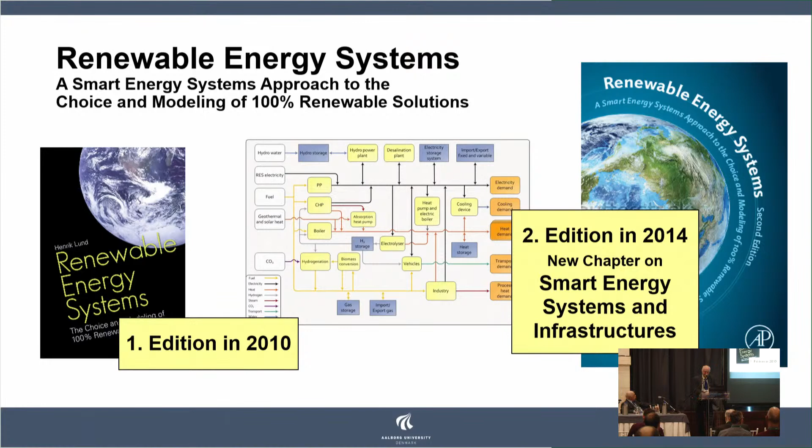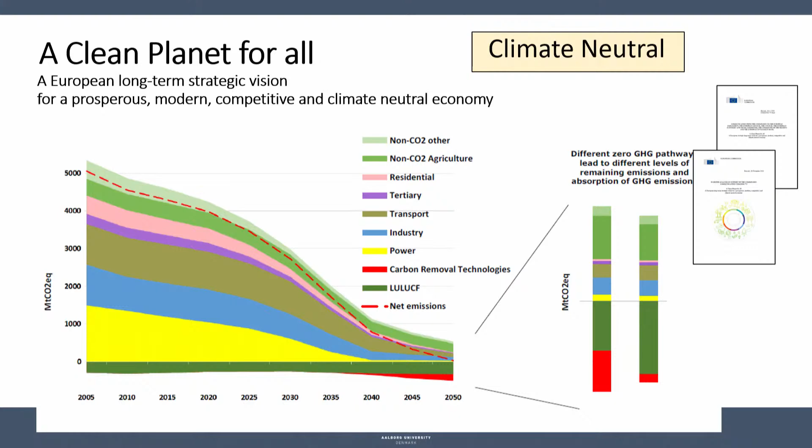And just as an example, this is taken from the European A Clean Planet for All report they issued a couple of years ago, and they use this word climate neutral, and they also look not only at the energy sector, but much broader than that. And when we have politicians looking into these types of goals and targets, then I think it's our contribution from the scientific point of view, and also from industry, to say how we can do this, because it can be done in many ways.

And no matter if we word it 100% renewable energy or climate neutral economy or however we put the words, there are different ways of doing it.

And what I'm sort of in, and I believe many of you also, we are in the business of identifying the best, the most doable, and the most affordable ways of making this green transition, both from a technical point of view, but also from an economical point of view, and also from a road mapping political point of view. How can we do this, and how can we work as researchers in order to identify the best and most affordable and most doable ways of doing it.

And the way we work with this in my research group, and I guess many others do in principle the same, is to put our energy systems into computer models and then play around with: now if we build a lot of wind turbines, what will happen and how can we deal with that, and many of the other things. And that is also what we do at Aalborg University with this model here that is a freeware already mentioned by Soteris. So please download and play with it if you wish.

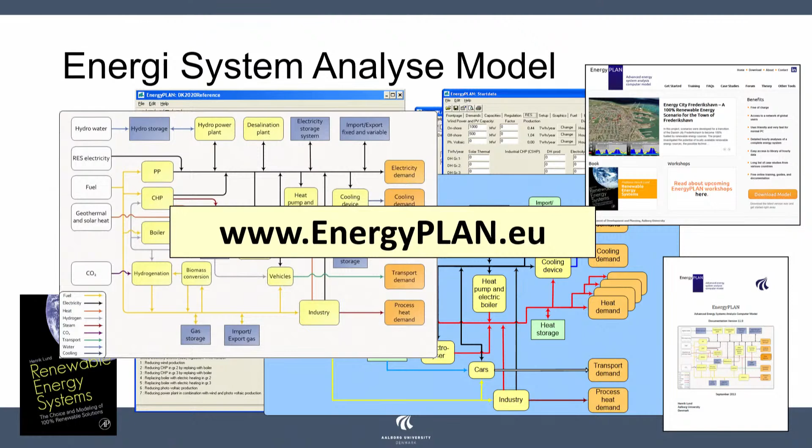When we talk about smart energy systems, and I will elaborate a little bit on that, because this is our suggestion to an approach to take if we should organize ourselves so it will be doable for us and possible for us to identify the best ways. Then I always start with saying a little bit about smart grid, because the reason why I and others started promoting the concept of a smart energy system is because we once had this smart grid popping up.

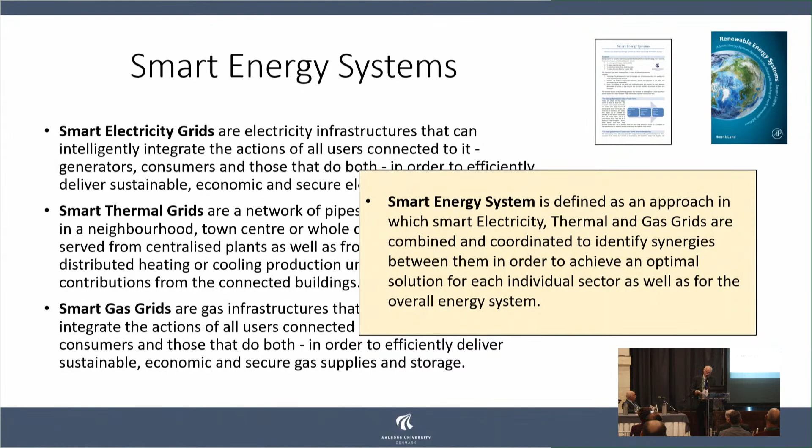But the point we tried to make by doing this is that if we really wish to be really smart, then we should not be smart within the different grids and in the different subsectors. We should be smart across the subsectors, and that's how we define the concept of smart energy system, that is taking a cross-sectoral approach to be smart and also identify the synergies between the sectors.

We published a review paper about that some years ago. There we can see that its concepts have sort of been implemented and used in a number of papers since, even though there still seems always to be some discussion on what exactly we are talking about and what is the definition. But at least this is sort of developing itself in a direction where we agree more and more upon that.

But what is a smart energy system? You can say it's an approach to identify the best and most affordable solution. It's sort of a guideline. If you wish to really do this well and be smart, then how should you do it?

You can even say it's a theory, because when we promote this and I talk about it, I make the theoretical statement that if you wish to identify the best and most affordable solution to the green transition, you must take a cross-sectoral approach. You must take a holistic smart energy system approach. Otherwise, you'll push yourself into some corners of the whole problem and identify suboptimal solutions. So that's the idea about this.

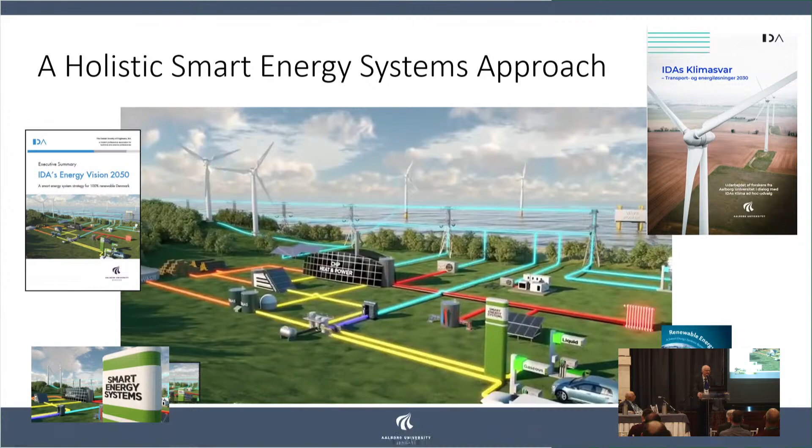And basically, the idea is to recognize that the different subsectors and different smart grids need one another in order to find the best solution. It's very difficult to green the heating sector without some kind of input from the electricity, heat pumps and the like, and also excess heat from different processes and production. That is the most affordable and best way to green the heating sector. And maybe you cannot do it without certain inputs from the electricity sector. So the electricity sector will have to help the heating sector.

Also, the electricity sector will have to assist the transport, because we should have electric cars, but not only that, also all kinds of power-to-X to deal with sustainable aviation and things like that. So we also need the electricity sector to assist the transport sector. But then in return, the transport sector and the heating sector can make a very important contribution to the electricity sector, and that is in the balancing of wind and PV.

Because if we recognize we have to convert some of that electricity into heat or gas or liquid fuel or whatever we need in the other sectors, then we also have the possibility of storing all the fluctuating wind and PV after it has been converted into something that is much more storable and affordable to store, rather than try to store it as electricity consumption or electricity production.

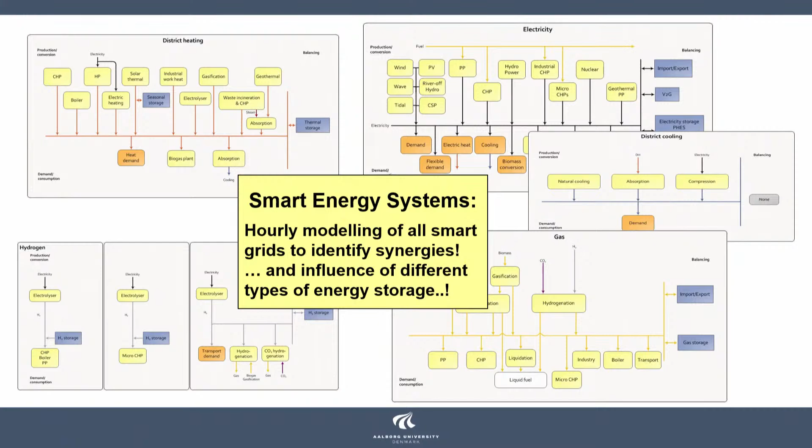And that's what we have designed our tools to be able to do. That is to take all sectors in and make hourly calculations of all the sectors, and also to include as many conversion units as possible and various types of storage, so that we can play around with it. Can we identify those synergies? And can we design a system so we can do with the affordable technologies and don't corner ourselves into being forced to invest in the very expensive technologies? That's the game.

And one of the reasons why this is incredibly important, and why, if you take this approach, you will be able to identify better solutions than if you don't, is that there is a huge difference in cost if we try to store energy as electricity. I define electricity storage as you put electricity in, and then later you take electricity out.

It could be a lot of technologies, of course, batteries. It could be, as illustrated here, pumped hydro. It could be converting to hydrogen and back. We don't have mountains in Denmark, I often say, so we cannot use pumped hydro, but we can use compressed air energy storage instead, and so on. There are many technologies, but common to all of them is that they are in the order of magnitude 100 times more expensive than building a thermal storage.

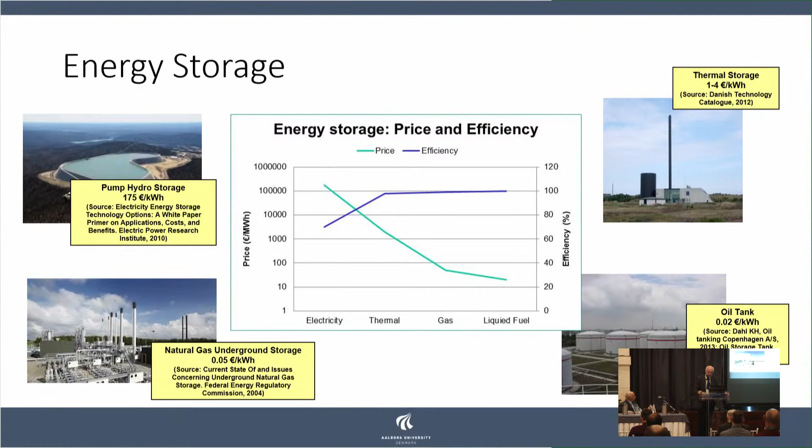And this cost relation is important because if we can design a system in which we do not really need a lot of electricity storage, then that system will be so much more affordable compared to if we can't. And that's why this is important. This paper here documents all the numbers I just used.

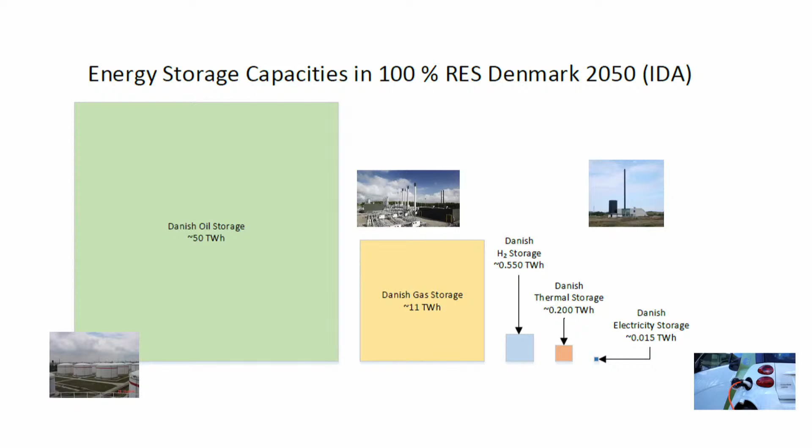And when we do this, the only electricity storage we have is actually the one for the electric vehicles. And as you can see on this illustration, it's very small compared to all the other types of storage we need in the system. And this is a system that we have calculated hour by hour in all sectors, 100% renewable energy in 2050 for the case of Denmark, where we can document how all storages are filled and emptied, so we can document this can work with this storage as you see it here. And that's good news, because this means that we don't really have to invest in a lot of electricity storage, which is good because they are so expensive.

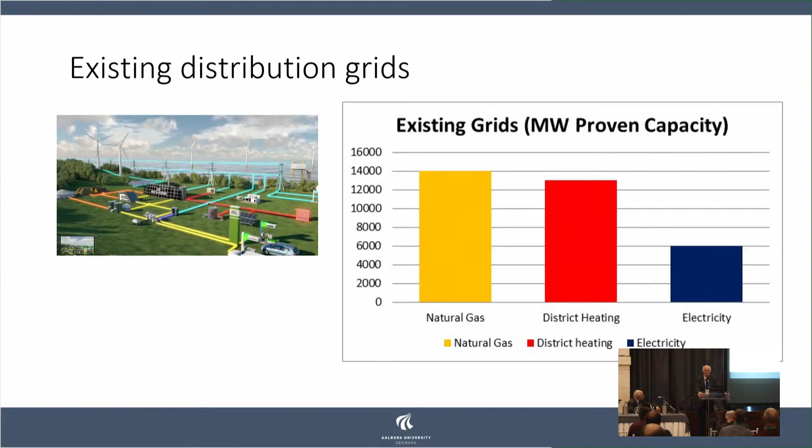And we calculated once, if we put everything from the heating sector onto electricity, converting everything in Denmark into electric heating, then we would have to build a lot of wind turbines to supply that, and that would cost a lot of money. But then we also calculated what the cost of the grid would be. And the cost of the grid exceeded the cost of the wind turbines, because expanding the distribution grid in Denmark by a factor of 4 would be extremely expensive. And then we also calculated that if we also need electricity storage, the cost of the electricity storage exceeded the cost of the grid, which exceeded the cost of the wind turbines.

So the idea here is to say that we already have some infrastructure ready. And of course we should electrify a lot. We should have electric cars and also electrolyzers and a lot of things. But there's no need to overdo it, because if we overdo it on the distribution level, then it will really cost a lot of money.

But if we do not overdo it and make use of the existing infrastructure and then add to that more on the transmission level, and the transmission level is so much more affordable to increase than the distribution level, then this is doable. So these three things here with the infrastructure of the grids, the infrastructure of the storages, and the cost of the storage, this is just to illustrate why taking this holistic approach is so incredibly important.

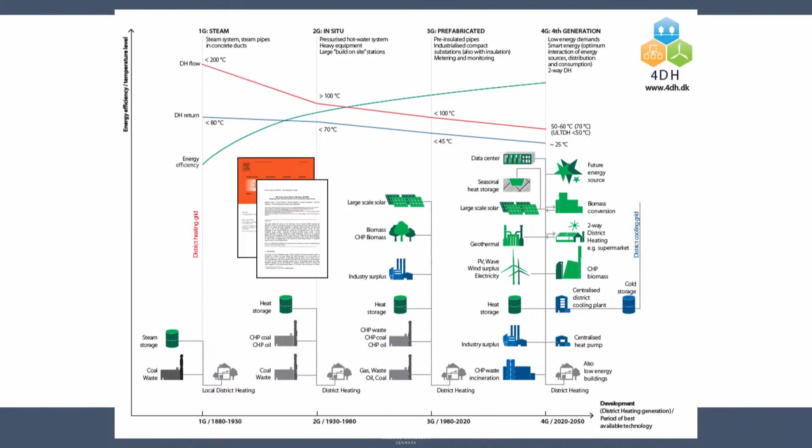So right now all people who have a gas boiler in Denmark, or oil boiler for that matter, or electric heating for that matter, they are calling their local district heating company and want to be part of the district heating supply. And all district heating companies in Denmark are expanding as fast as possible, but still it will take them several years to put all the rest of the customers into the systems.

And then you can say, is this stupid? Because one of the reasons that we have so much district heating and have so much success with it is that we have been producing our electricity on steam turbines fired on coal and whatever. And this is not something we should do in the future, because in the future we should replace these coal-fired power stations with wind and PV. But from what we see, there will still be, or there will be even more excess heat in the future.

And we have sort of looked into in Denmark what we have of industrial excess heat potential that we are not already using. And even though we electrify some of them or put them to biofuels or whatever, we will still have a huge potential in the industry. We also looked into the expansion of data warehouses in Denmark right now, and we're expanding them so fast that if we succeed, then in a few years, the potential excess heat from our hyperscale data centers in Denmark will be equal to 1/4 of our district heating demand, quite a lot.

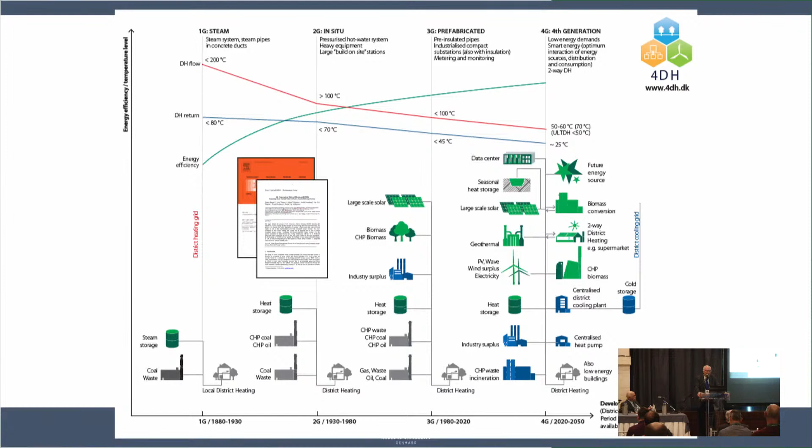The really important thing is that the sources for providing district heating in the future, no matter if it's a heat pump or one of the many resources I just mentioned here, geothermal energy, waste, whatever, can do so much better if they are allowed to deliver at a lower temperature compared to what they are now. So that's what we promote as the fourth generation district heating technologies.

And we have also been promoting this on the European scale, and actually the European roadmap studies, there are 4 of them now, have shown how it will be both more affordable and doable to implement the political goals in Europe if we include district heating compared to if we do not. And we also aligned that with what we call Smart Energy Europe, a study where we have looked at the whole of Europe, and we also looked at it at the city level.

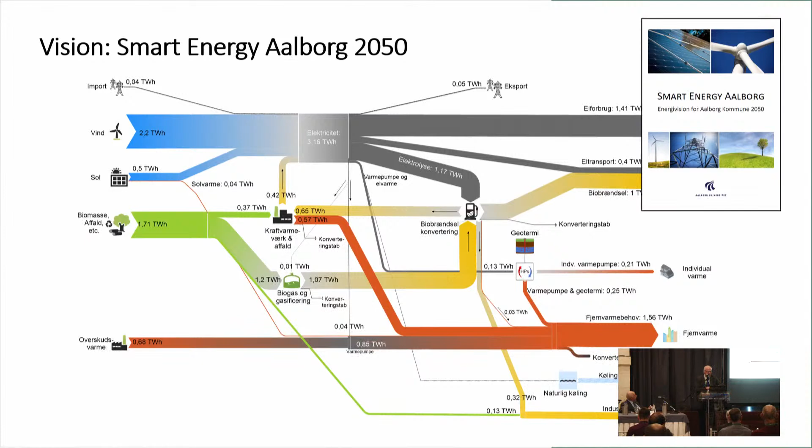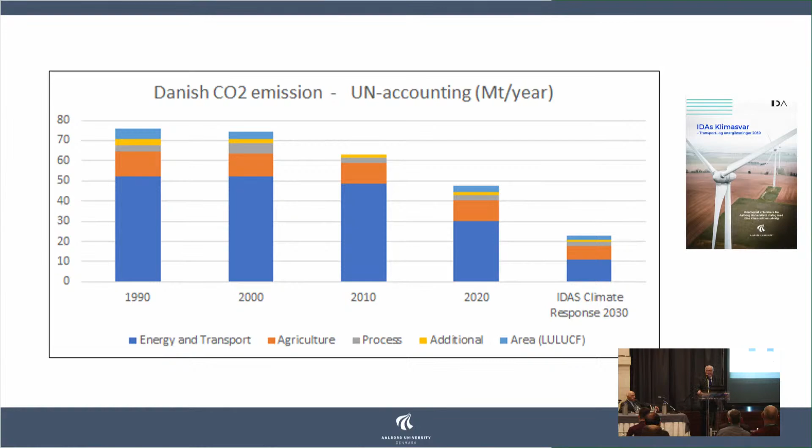But additional to that, we also have agriculture. In Denmark, we have a lot of agriculture. And we have processes from industry and so on and so forth. And all these other sectors also emit greenhouse gases. Maybe not carbon dioxide for all of them, but it's still part of the greenhouse gases. So somehow we will have to align ourselves with those sectors so we can achieve it for all sectors, so we can go climate neutral and implement those targets.

So we did a study. We have done a lot of studies, our research group together with the Danish Society of Engineers, starting back in 2006. But recently we did a study where we updated our studies and related them more to the new political goals. And one of the things we had to ask ourselves is, if we make a study on how Denmark should do the green transition, how should we then look upon Denmark as part of Europe, as part of the world?

Because there are so many ways you can do decarbonization and renewable energy. One way is to import ethanol from Brazil, and then you've more or less dealt with the transport sector. Or you can build a lot of wind turbines and then export them and claim that they are replacing coal-fired power stations somewhere else.

But what we said to ourselves, and we produced a guideline on how to think about this, is that it will not make any sense that one country, no matter if it's Denmark or any other country, does the green transition if all the other countries are not doing it. Then we might as well forget about it. So this is something we do together, this is something we do in parallel.

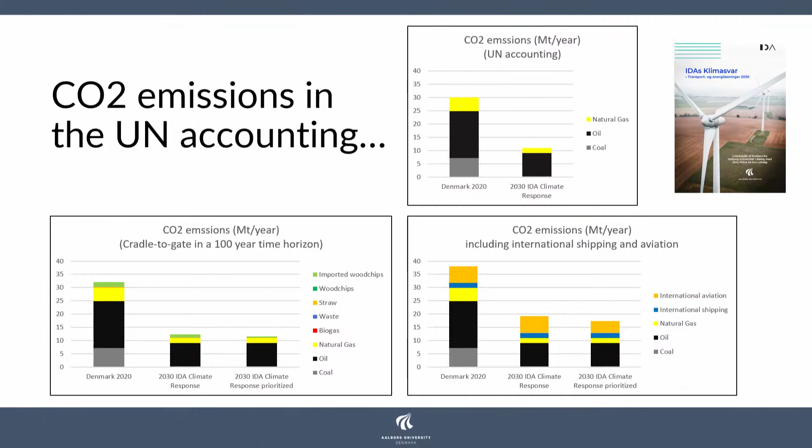But what is really important is when we identified our share of international aviation and shipping, and you can see that to the right there in the orange and blue color, then it really changed the whole picture. Because if we include that, then it's a quite different ball game. Then we really have a much stronger challenge than is so far recognized by the politicians.

So we did a strategy for 2030, and even though the Danish Parliament has the target of 2050, we said maybe we can do it a little earlier. So we said 2045, just to put that on the agenda. And now we have started a race in the Danish Parliament, where we have 12 parties, and some of them say maybe we could do it even before that. So now I have started saying maybe it's not only a race on how early we can do it, but also a little bit on how we do it. So that's the issue right now.

But what we then defined is a fully decarbonized Denmark by 2045 in all sectors. And the important part here, when we see how we should collaborate with the other sectors, is that we cannot really see in Denmark that we can bring some of the other sectors to zero. We can do a lot within the agricultural sector, but we don't think we can bring it to zero. We think we still will have to produce some cement; we have a cement factory in Aalborg, and we don't think we can bring it to zero. Of course, we can replace fossil fuels, but there's still something in the processes with this type of industry and others also. The same for flight contrails and whatever.

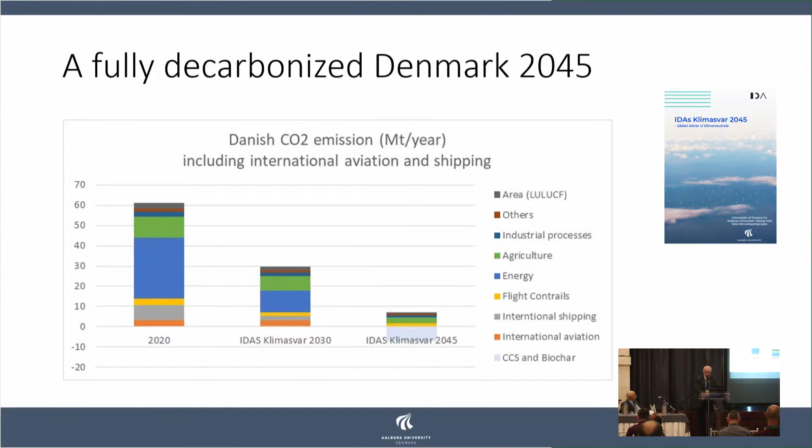Our approach from our study is that we should not dismantle biomass. We should further develop it in the direction of making sure that it's sustainable, and we should also actively make use of residual resources that are sustainable. And what is also important, develop it in the way that we use it in the correct way. And this diagram here is our very complicated approach to how we use what we believe we can identify as sustainable biomass in Denmark. And then we use it in various technologies.

And the reason why we use it in various technologies is twofold. The one is that all these technologies are not available on a commercial level yet. Some of them are, but not all of them. And maybe they will not be commercial within the timeframes we have. Maybe they will, maybe they won't. For that reason, it's good to have a combination of many technologies, so if one is failing, then we may be able to use the other. For example, if you look at straw, the pathways are manifold: thermal gasification, biogas plants, and so on. That's one reason. The other reason is that there are strengths and weaknesses of all these technologies.

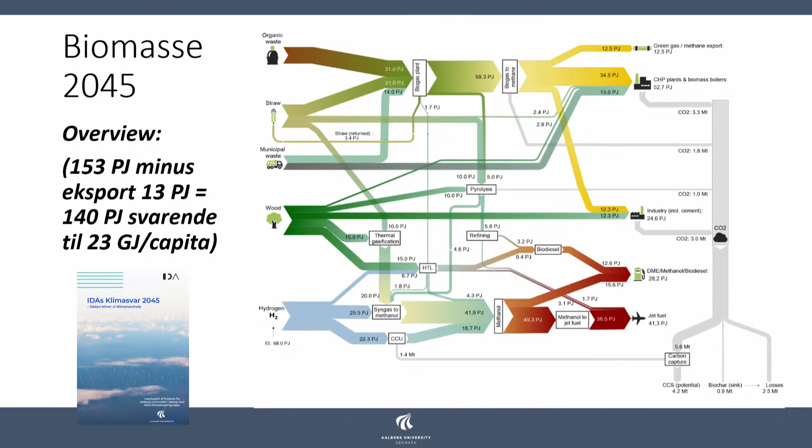And then at the same time, as you can see to the right, we also identify all the point sources we have, both in terms of time and variation and what it will cost to bring them to carbon capture, and also what type it is. And then we identify what we need for carbon utilization, CCU, the circular solution, and what we have left that we can potentially use for storage and biochar.

And by doing it this way, we believe that we can make a scenario that is sustainable in the ways I just mentioned. Time is running, and we should also have time for questions before lunch, so I'll close very soon.

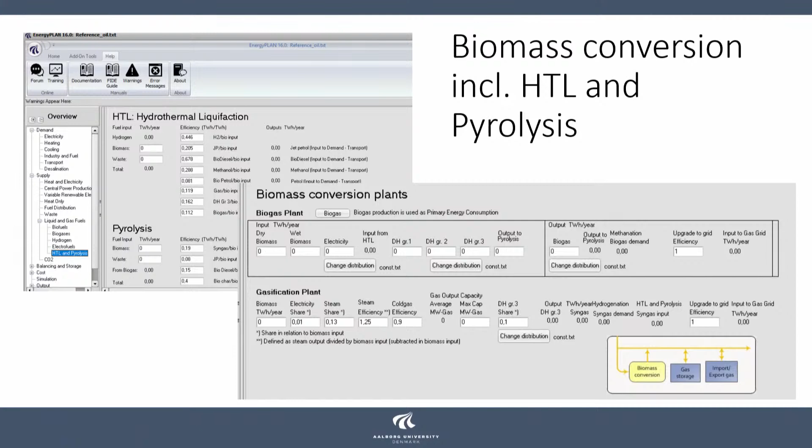But I'll just mention here that this is where we have really expanded our energy system analysis model, to be able to look into this relatively complex issue of dealing with the biomass in a good way. We also published 3 papers about this study: one on the overall study, one on the biomass issue that I mentioned, and one with a focus on transportation.

Okay, I actually have a few more slides, but I think it's better I stop here and make room for some questions. Thank you very much, Henrik. Okay, time for questions. Wait for the mic to come.

Hi, Shashank Prabhu from Fraunhofer Institute. First of all, thank you very much for a really interesting presentation. You specifically mentioned the electrical grid potential and then the district heating potential, which is double that of the electrical grid.

So in that light, can you shed some light on the role of distributed energy generation, maybe in local communities or small groups, and with the help of that addressing both reducing the load on district heating and maybe increasing the potential of the electrical grid? Thank you. Yes, I can do that, and I can also refer back to the presentation that Neven Duić made this Monday here.